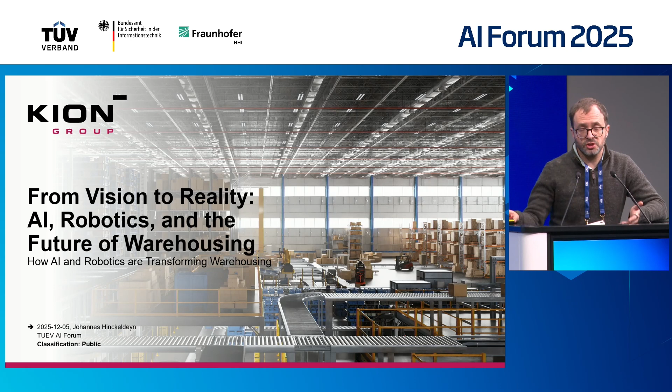What I'm going to tell you today: first, I will show you a few products where we already use AI. Then I will look into the products and research activities we are currently working on. And in the very end, I will go into a few problems you might already be aware of, just to let you know what are the most important problems, from my point of view, which have to be tackled in order to bring AI to a sector like intralogistics or the warehousing industry.

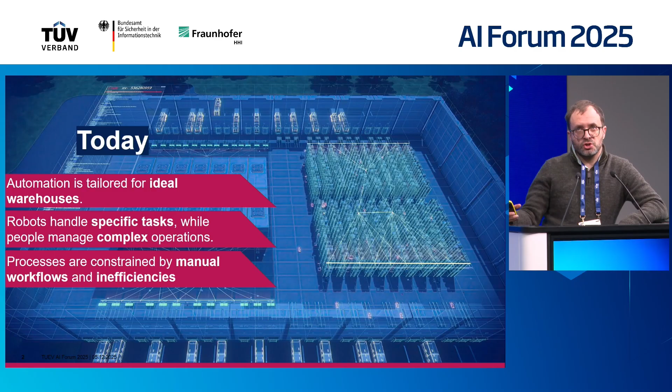Just very briefly, if you're not so familiar with the warehousing industry so far: warehousing today is a very static and inflexible environment. We have a lot of automation already in our warehouses, but it's all built for the ideal warehouse. The warehouse has actually been built around the whole automation solution as it is today, which means the robots are doing quite specific tasks they're programmed for. It requires a lot of engineering effort to get them running, and it is still very much coined by manual processes and a lot of manual labor, which we still have in our warehouses.

In the future we also want not just greenfield warehouses, but also brownfield warehouses, because a lot of our infrastructure has been here for decades and will still be here in the next decades, I think. So we need robots which are quite more flexible, more adaptive to a certain situation, more autonomous, and we need some kind of continuous optimization of our problems.

As a company, how we tackle that: in 2020 we started the first research projects working on AI, and it took us a while to really get this off the ground. We formulated an AI strategy, and this year, after almost 5 to 6 years, we came up with the first AI products, which I will show you in a second. From next year on, we are trying to go all in, really trying to scale our automation products using AI models and machine learning.

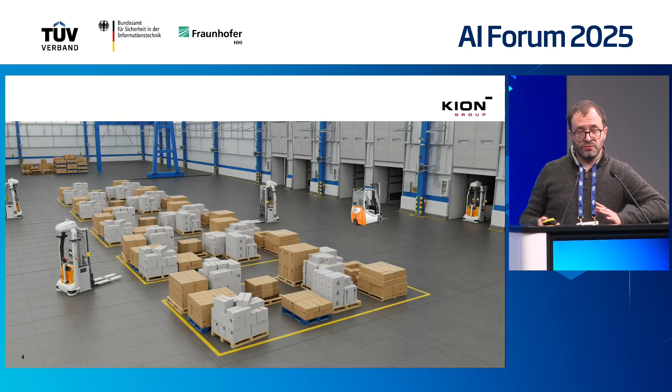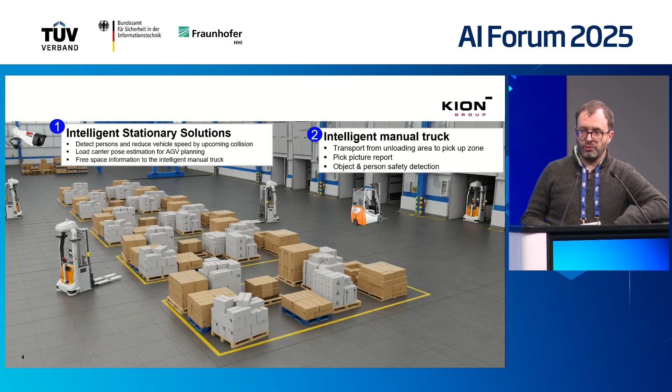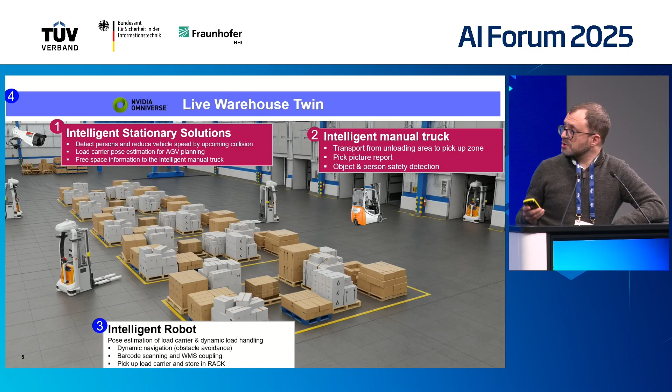Those are the products, and I will only go into a few examples here. We are currently providing an intelligent stationary camera, which I will show you in a second, and we also use AI as some kind of driver assistance system for our manual forklifts. In addition to that, we also have intelligent robots, which you will see, and also a live warehouse twin, which I'm not going to go into detail about today, but just to mention those. The intelligent stationary camera and the driver assistance systems are the products I'm going to show here.

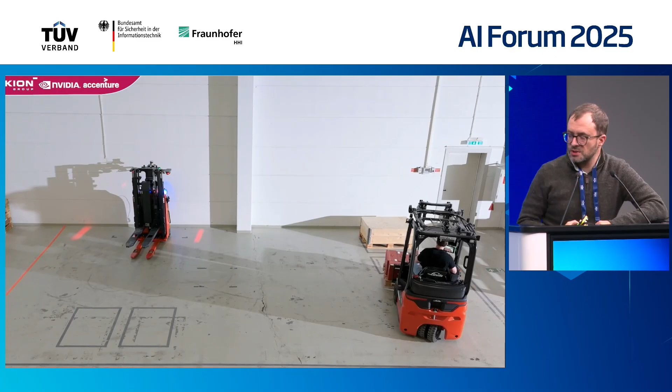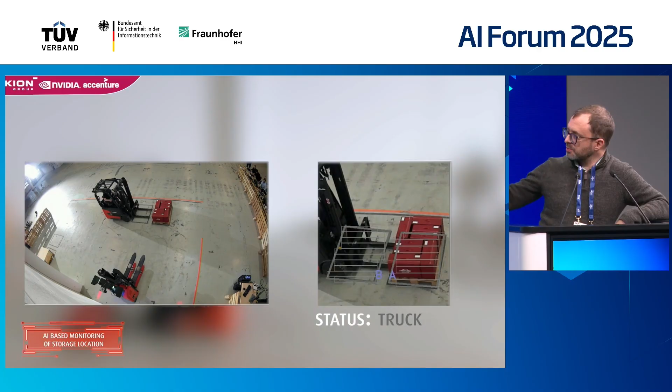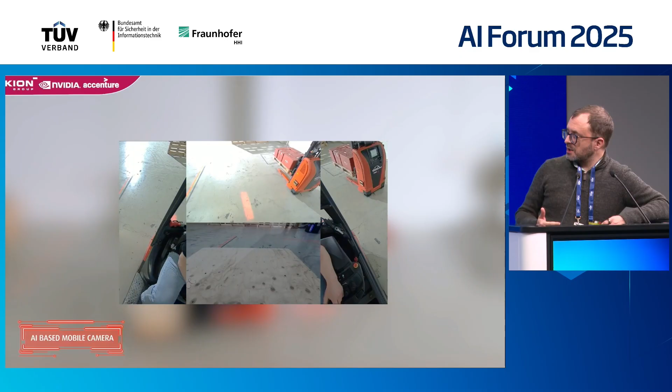The AI camera solution, as you will see, still very much requires a human in the loop to use it, but it should enhance the human driver as he's working. For example, as you can see here, we have a buffer space, and the buffer space is usually unmanaged from a systems perspective. We use this camera simply to identify whether it has already been occupied by a pallet or by a load carrier, as we call it, as you can see here.

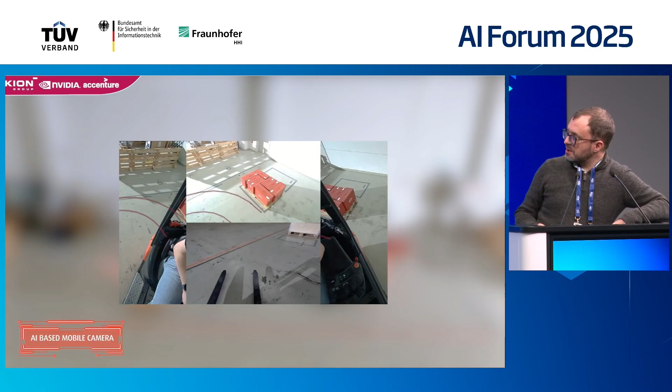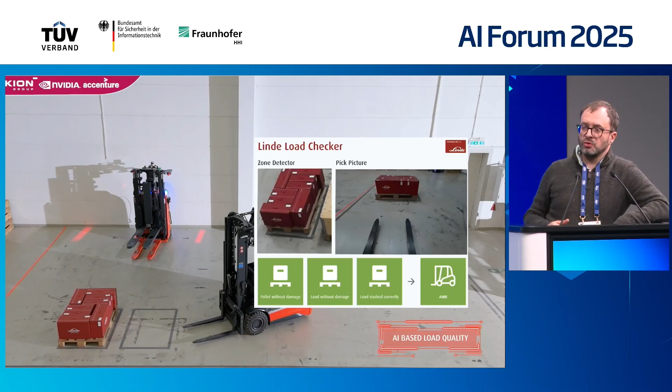Another thing here, as you can see, is the driver assistance system. It shows the driver not just simply where he is going to drive, but also if there is an obstacle in the way. We use the human in the loop to really see if there is a problem. Another thing we are working on is what we call AI-based load quality. We have an AI model coupled to the AI camera in order to determine how well the quality of the load carrier is, and if there's something which has to be done to put this back into a more proper state.

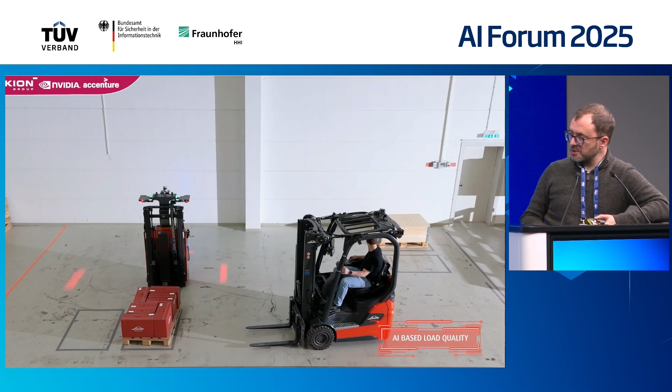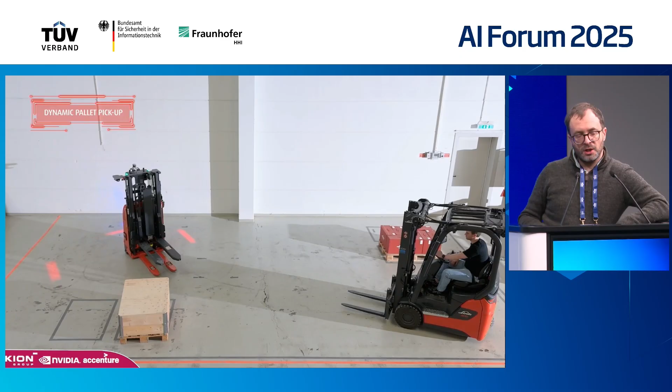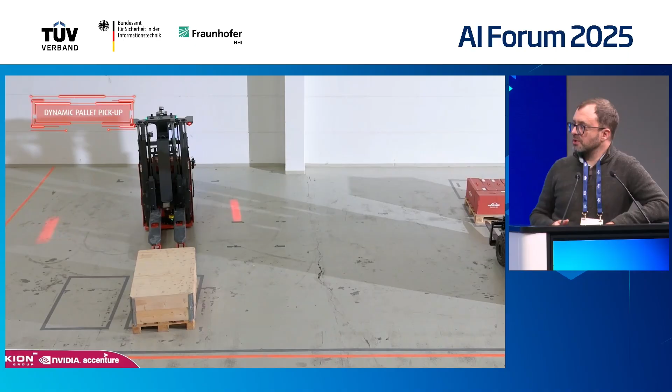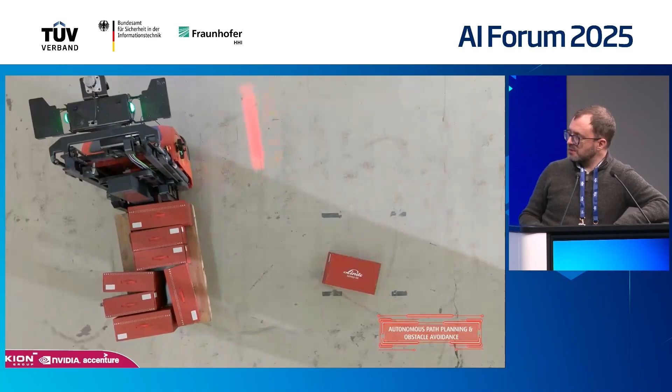And of course, as you have seen, we have also an autonomous robot, so which means we basically try to use AI systems, mostly computer vision models, in order to determine the status of objects to be manipulated. Because in contrast, for example, to autonomous driving, we usually try to avoid bumping into any other object. But for us, it's more important that sometimes we want to actually collide with an object, but only with certain objects, obviously, not necessarily with all objects.

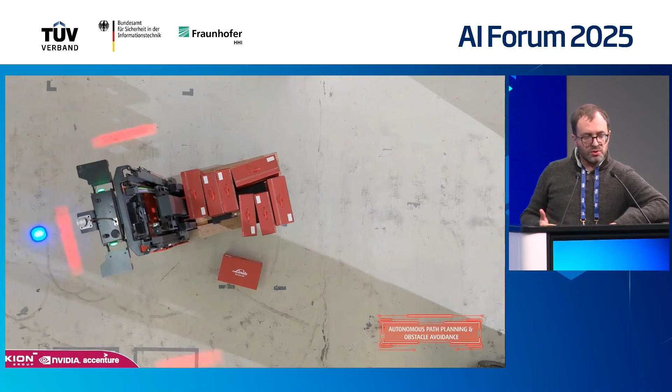So for this one, as you can see, we try to manipulate the pallet and bring it to somewhere else. And in order to do so, we really need to recognize the pallets, because as you can imagine, the pallets are so diverse, so that we have a lot of Euro pallets, as you might see, but this is only just one piece of load carrier.

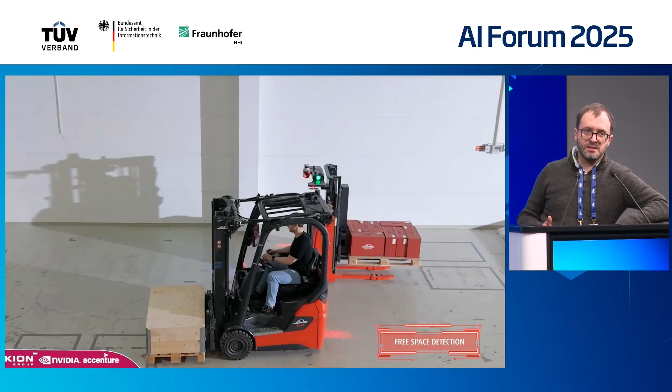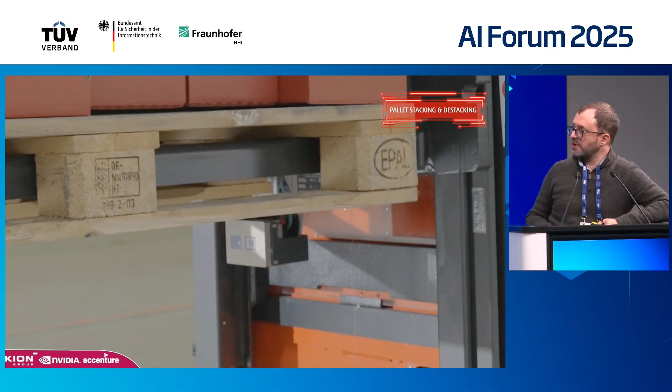And if you go to certain manufacturing companies, you will find, let's say, at least a high number of, let's say, double digit to the low 100s numbers of load carriers to be carried around, and everything would be basically to be handled by the AGV or by the autonomous forklift.

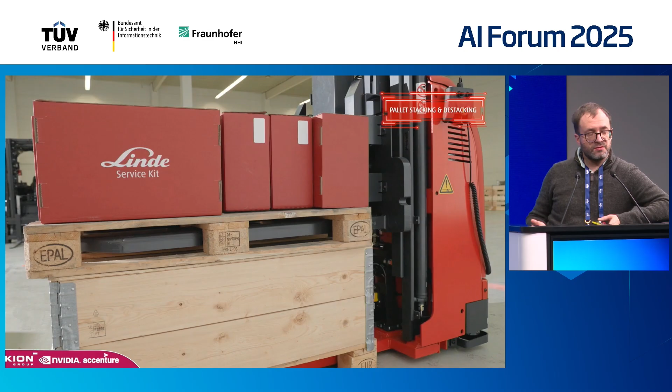And this, it's quite an interesting and difficult task, as well as you can see here the stacking, which makes a lot of assumptions, for example, that it really can be stacked onto each other, which is something that cannot be given for any kind of load carrier which you have, because you might have a lot of load carriers where it is not possible to put something on top.

So those are the products which we are already having. And in addition to that, we are currently working on how to use large language models and all these kinds of foundation models in order to set up our products.

At the moment, when we basically commission one of our new vehicles, there's a lot of engineering effort included. So it's always an engineered solution for a particular use case. So we have a lot of software engineering to be done in order to really set up the use case. And this makes the project and also the use case in the very end very expensive, which is obviously not something we are very happy with, and also the customer is not very happy with.

So we currently are working on a so-called reasoning agent, and the reasoning agent is basically there so that you can program them using manual, just natural language, and then try to set up the whole project, to set up the whole vehicle without having a software engineer on site. So let's say have just a service technician in order to set it up, which would drastically reduce the commissioning effort and also the cost of such a project.

And this is just the latest results from one of our simulations. So we are currently trying to test this in practice as well.

As you will see here on the down left side, there is a natural language command typed into a prompt, and this prompt is basically translated into a behavior tree, and this behavior tree is then used in order to steer the forklift, as you can see here. So it should basically drive to a pickup zone where the position of the load carrier is not very well defined, but just had to look for the position, had to pick up the load carrier and bring it to the drop-off zone without specifying geometrically where the load carrier should be placed.

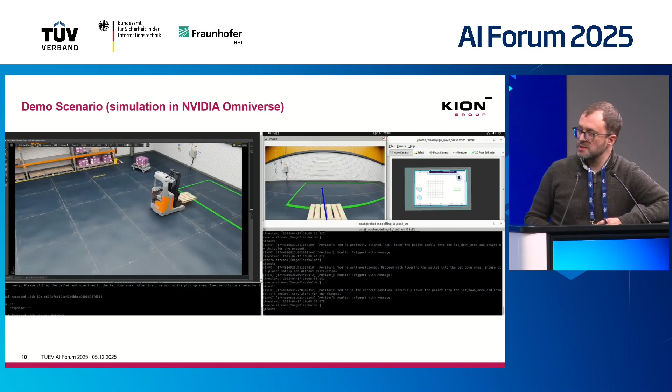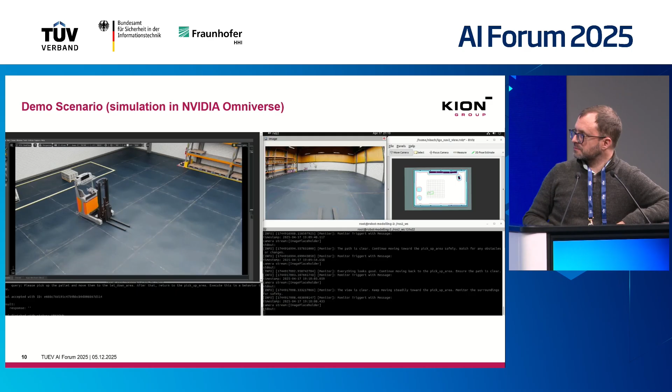And as you will see here, it's something like, I wouldn't say it's 100% optimal driving behavior, because it more throws the pallet into the drop-off zone, but it's basically doing what we are intending it to do. So that's something we are actively working on.

But my main message I want to convey today is basically that productization, especially of embodied AI, is quite hard. So why is it that hard?

So the one thing is, as I mentioned, we have a lot of brownfield areas. We have a lot of very diverse areas, very diverse factories, warehouses, distribution centers, everything. And they are all individual. And the thing is, we always need domain adaptation. And this domain adaptation requires a lot of engineering effort.

And if we want to have real automation, really being successful and really cost effective, we need some kind of models which can more or less autonomously adapt to different situations to avoid any out of distribution problems.

We've already talked a lot about safety. Safety is good, and I really appreciate a lot of the effort put into safe machine learning, safe AI. But from our point of view, machine learning models are only safe if they can be functionally safety certified. Otherwise, they can be labeled as being safe, but for us they are not safe because we cannot sell them as safe.

Combining functional safety together with machine learning is quite an important task for us, because otherwise we will always stick to those products and solutions which are more like always needing a human in the loop, being an assistant to a human, or just having statistical purposes. And this would be quite sad, I think.